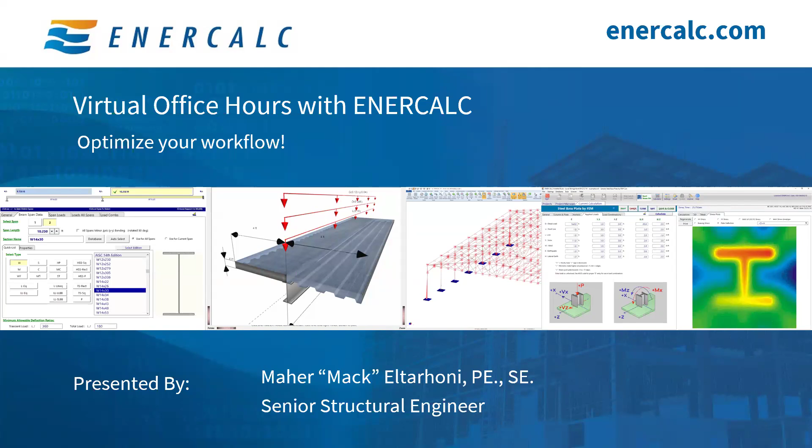First, I'd like to start our session with a brief overview of our overall agenda. We will be going over ENERCALC's latest updates, the what's new with ENERCALC, and we do have a lot of exciting updates today. Then we have the steel base plate design module and the bolt group analysis module. Then we'll go over registering for office hours to get notified for future installments, future sessions, and of course, live Q&A at the very end of our session.

First, I'd like to encourage you all to check your software to make sure that you are on the latest build of ENERCALC. Take a minute, open your software, and look at the very top to see the build that you're on. We do release monthly updates, so we want to make sure that you are using the latest and greatest of what ENERCALC has to offer.

We commonly receive questions on our support line, and a good majority of those questions are things that already have been addressed in recent updates. So always make sure that you're working off of the latest and greatest. That most of the times will fix many of the problems that you might be facing. Otherwise, you can always just email us at support@enercalc.com.

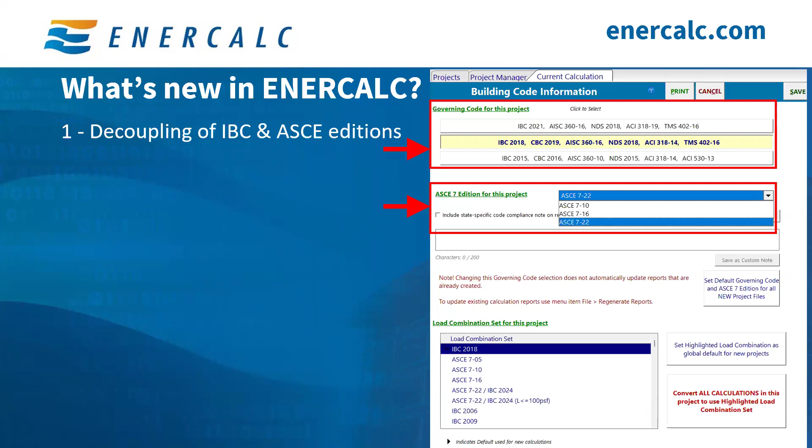Of course, the past few months we have done this, which is the decoupling of the IBC and the ASCE. This is due to some jurisdictions asking to mix and match IBC editions with ASCE editions. So they might want to use IBC 2015, but they want to use the latest and greatest ASCE, so ASCE 7-22. Before that, we were just lumping up everything in one spot, so based on the IBC you use, it'll grab all of the codes or the design standards referenced under it. But now you have the ability to select an IBC code different from the ASCE design standard, and this will hopefully provide you more flexibility in meeting the jurisdictional requirements that you have to adhere to.

The second update, which is also regarding the ASCE 7-22 modules, and I'm sure by now everyone has noticed all of these additional updates under the add a calculation or add calculation menu.

So the first tab is the seismic loads tab, and in here we added calculation modules for seismic base shear, seismic wall anchorage, and seismic demands on non-structural components.

Of course, another exciting update that's been going on now for a couple months is the ability to link reactions, which we call load linking, natively within ENERCALC. Load linking gives the user, of course, a huge amount of flexibility to automatically link reactions from one calculation to another, and the ability to change something in one member and have the effects of that change trickle down all the way to the supporting members downstream.

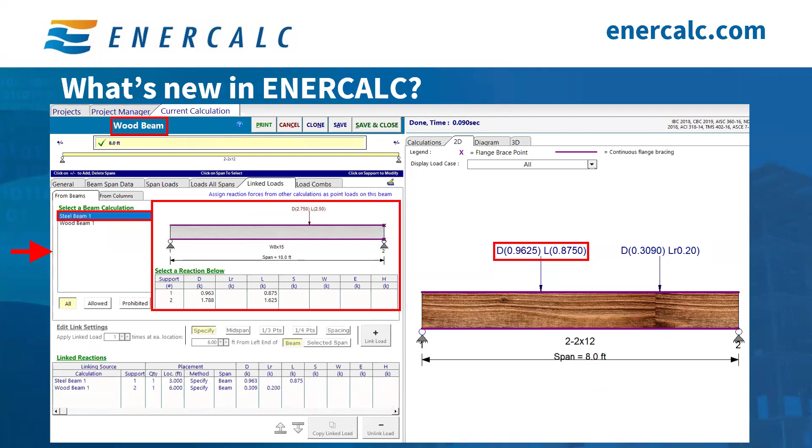And the user here has the same capabilities in terms of placement of linked reactions, just like what we did before in steel beam. So you'll have the ability to put the load at midspan or third points or all of that. So all of the capabilities that you have in steel beams, now you have them in wood beams as well.

And the standard load linking features are, of course, still functional after the wood beam integration, in a similar way that you would typically expect. You have the calc order tab that brings all of the linked calculations together and puts them in the load path order. If beam 1 is sitting on the girder and the girder is sitting on transfer girder 1, then transfer girder 2, depending on how these reactions are linked from one calculation to another, you will get the proper load path order, and you'll have these calculations listed in that load path order to make sure that everything is performed properly.

And of course, at the bottom, you still have your status badges right here that show you that if it's green, then the calculation is up to date. And then you have the orange and the red warnings.

And of course, the last item here at the very top is the recalculate linked loads button. That's whenever you change something in the first beam, and now you have 3 or 4, maybe 5 downstream members that got affected by that one member that you changed. So you don't have to go and re-update each calculation individually.

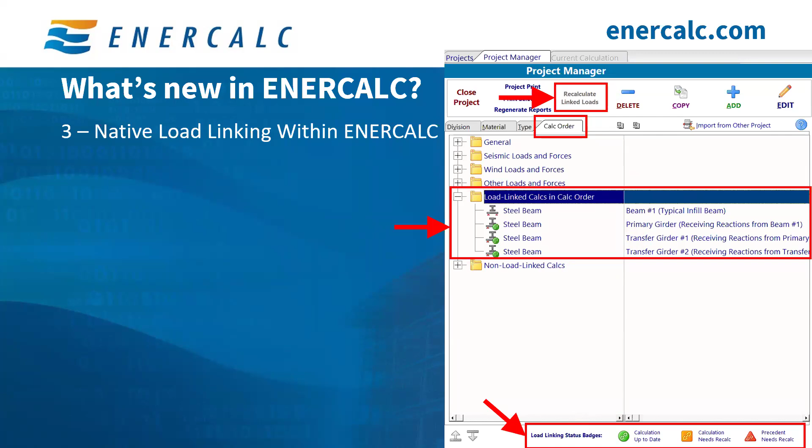All you have to do is just say recalculate linked loads, and ENERCALC is smart enough to know the load path and perform those recalculations in the proper load path order to make sure that all of those effects are trickling down to the members downstream. So overall, load linking is a powerful tool that allows engineers to create a well-connected chain of calculations while minimizing the risk of transcription errors.

And of course, now supporting steel beams and wood beams is definitely a great addition that's been going on now for a couple of months.

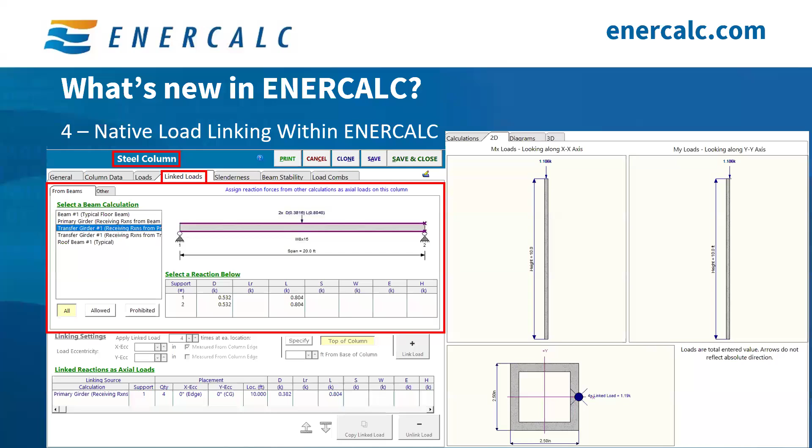And use that. Another update is training videos. We created additional tutorial video playlists, and they're posted on our YouTube channel. These playlists are easy to digest and provide step-by-step information on how to use ENERCALC. One that we recently updated is for the composite steel beam module. This goes through the various options, the loading, how to read the results, how to model everything, and the various options in correlation with the code as well. So this is very useful.

And the other one that we created recently is the soldier pile retaining wall module training video. That will take you through the whole process of how to use this module and understand its capabilities and limitations. And of course, we're going to have more tutorial playlists to come.

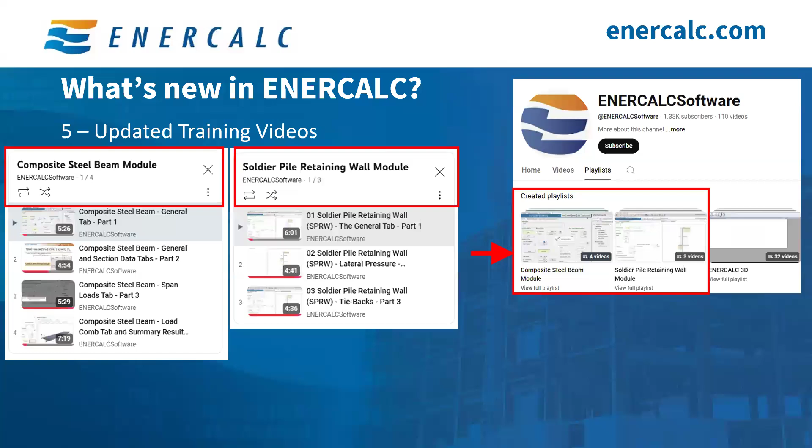So another update, yeah, it's been a busy month here at ENERCALC. Another update is the incorporation of the IBC 2024, and that is now supported as a governing code option. We will continue to support IBC 2015 as well to provide our users with as much flexibility as possible to be in compliance with the jurisdictions that have not caught up to the newer editions of the IBC. I'm personally located in Oklahoma, and I work in a few adjacent states, and my company still gets projects where we have to use IBC 2015. So it definitely hasn't died yet. So ENERCALC is making sure to keep that for our users.

And to update your project to use IBC 2024, it's pretty simple. Once you open a project, at the very top, you can find here the Building Code and Load Combinations tab. If you click on that, it will display this window that we're seeing here in the back. And pretty much all you have to do is pick the IBC that you want, and of course, click Save and Close, and you're good to go.

Now, keep in mind that this will change the code only for the current project that you're working on. So if you need to change ENERCALC to use IBC 2024 as a default for all of your future projects, then the way to do that is to go to the very top left corner, click on Settings, and then click on Default Governing Code and ASCE 7 Editions. This window will pop up.

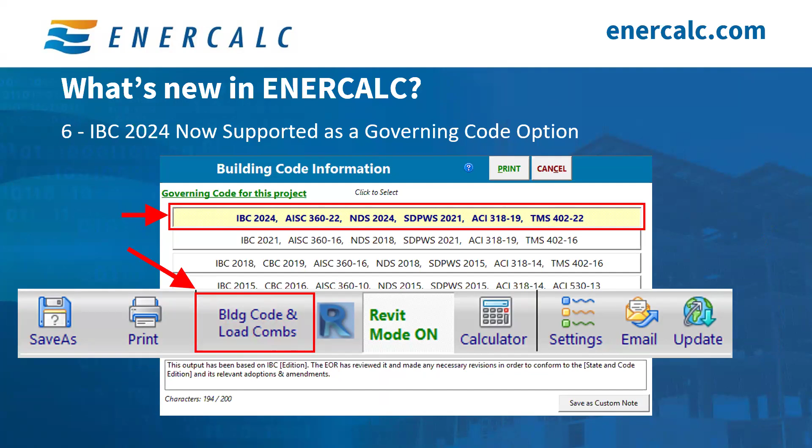The last item I want to highlight before we get into the steel baseplate module is ENERCALC for Revit. ENERCALC for Revit is a Revit plugin that allows you to design structural members fully within Revit. You don't have to export any information. You're not exporting stick models, stick analysis, stick frames, or any of that stuff to another calculation software. You're practically doing everything from within Revit.

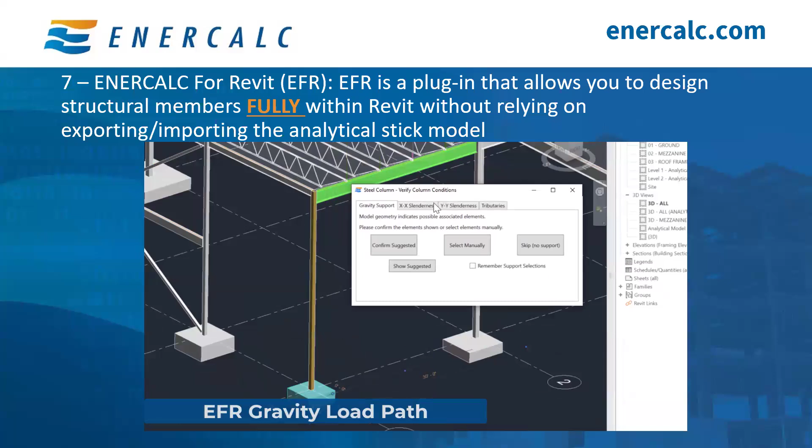It's a simple point and click, as you can see here, and it allows you to design a member in a fraction of the time. All you have to do is follow simple guided prompts that will take you through the design process, and before you know it, you will be done with the design. It's that easy. And currently, EFR, or ENERCALC for Revit, supports the design of steel beams, steel composite beams, wood beams, steel columns, and foundations. So that provides a full gravity load path for you. And more is already in development and underway.

And while we're on the topic of ENERCALC for Revit, it is worth noting that Autodesk released Revit 2026 on April 2nd, 2025. So that's exactly 1 week ago, last Wednesday. And I'm excited to share today that ENERCALC already released the update for the ENERCALC for Revit product, which provides support for Revit 2026. We know that our users rely on our software for their daily engineering tasks, and we want to make sure that ENERCALC is never the bottleneck of your production line.

So we issue these monthly updates to make sure that everything is updated as much as we can, and to make sure our users are best equipped to handle their daily tasks. So this update just released today for ENERCALC for Revit. For our users who have ENERCALC for Revit, if they have a project that uses Revit 2026, they are good to go. Once they have this update installed, they will be able to move on with their production.

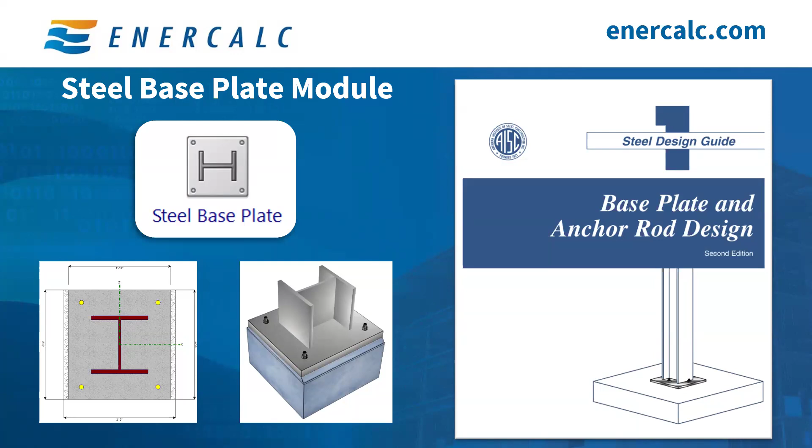So moving on, the focus of our session today is the design of steel base plates in ENERCALC based on the second edition of the AISC Design Guide #1. So here's a quick overview of the capabilities and features of the steel base plate module. You can perform analysis of steel plates as well as anchorage forces, so anchor design, or the forces that go into the anchors. Ability to apply axial loads, shear loads, and moment loads as well. Next you will have dynamic 2D sketches and 3D sketches for visual confirmation, and results include max tension per bolt, and that is very, very critical.

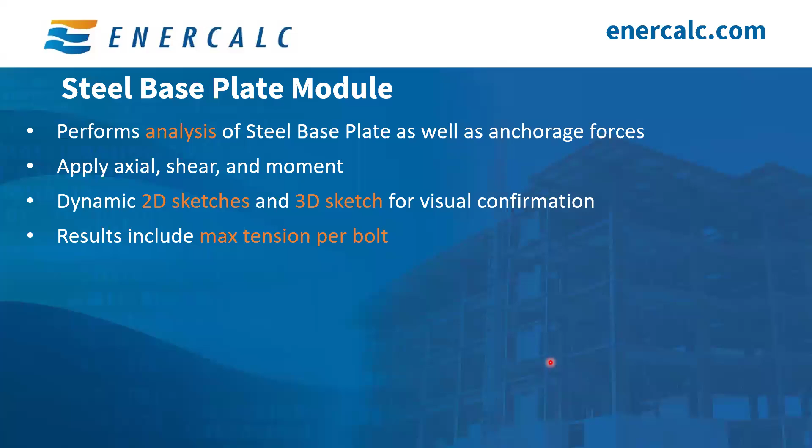So we're gonna go through this example today, and our example is that we need to design or examine a base plate that is 24 inches by 22 inches. So the N dimension is 24, that's the length of the plate, and the width of the plate is 22 inches, and we want to have an edge distance of 2 3/4 inches. We have concrete support below the base plate. This is just a pedestal that is 24 inches by 22 inches.

So a pedestal that's exactly the same width as the base plate. We have a W12x96 column. F'c for concrete is 4 ksi, or 4,000 psi. The ASD factor of safety for steel is 1.67, and the ASD factor of safety for concrete is 2.31, and those come directly from the AISC manual. The applied load is 50 kips axial, and we have a moment of 120 kip-feet.

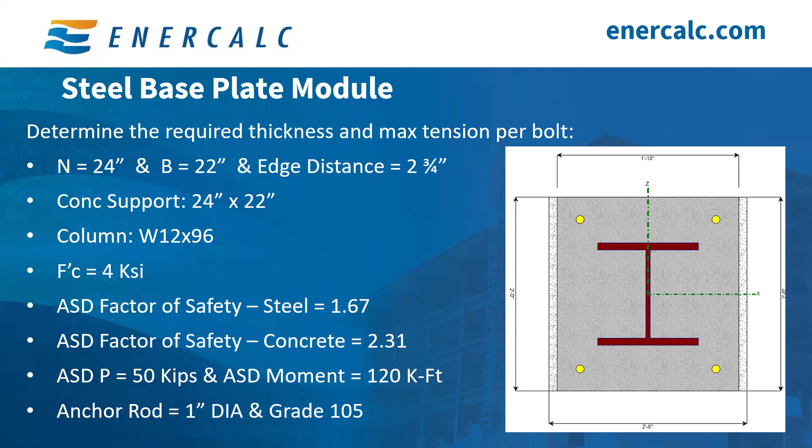And we are using 1-inch diameter rods, grade 105. So this is what we're using today to make our evaluation of this base plate. To start a new base plate calculation, we follow the same familiar process. You click on the Add button, navigate to the Miscellaneous tab, and click on Steel Base Plate to open the new calculation.

So again, the same standard process that we use for all of our modules. We work our way through the tabs from left to right, starting at the General and Materials tab right here, all the way at the top left. First, we give our calculation a unique name. I'm naming it: example base plate AISC Design Guide 1, axial plus large moment.

If you're familiar with the design guide, there are different methods and calculations. You have axial alone, moment or bending alone, axial and large moment, axial and small moment, and axial and biaxial bending. Just to make sure we're all on the same page, this module does not handle biaxial bending. And the second thing it does not handle is net tension.

So if you have net tension or net uplift, pure tension on your base plate, this will not be able to handle it. However, it handles the other conditions: axial alone, small moment, large moment. It goes through the various calculations. For our example, I went for axial with large moment because that's a little more fun. So that's the disclaimer, the limitations of use and the capabilities, so you know what you're dealing with.

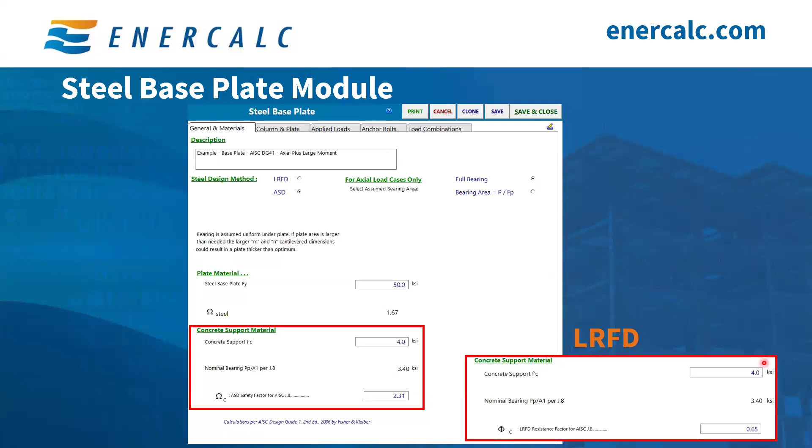So we move on to the next step, the Column and Plate tab, where we give a little more geometry. We have three items to input here: information about the column section we're using, the base plate, and the concrete support, which in our case is the pedestal. Sometimes it's a foundation, or a column on top of a beam, whatever concrete support you're using. That's the third part you have to input.

So with that being said, starting with the first part, in our example we have a W12x96. That's what we need to use.

So we simply click on this button right here. This lookup button will give us this new window, which is the database. You can select the type that you want to use. So for example, if it's a W section, if it's a channel, if it's an HSS, you choose whatever you need to choose from here.

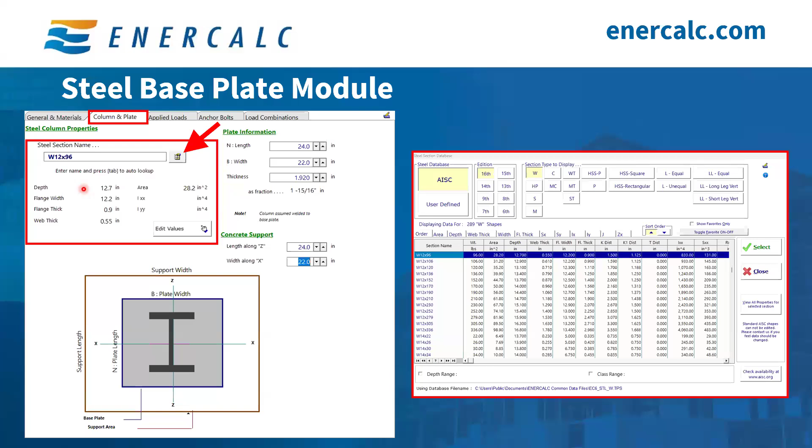And then based on that, in our case, we're choosing a W section, and then you can scroll down until you reach a W12x96. Once you do that, it automatically populates your geometry, so you don't have to worry about that. So that's the first part, pretty easy.

Moving on to the second part, which is the plate dimension. If you're working something from scratch, you have to come up with trial dimensions. The AISC design guide has some recommendations on how to determine initial trial dimensions. But with ENERCALC, you can just plug and play until you come up with something that works for your project, as well as, of course, works from an engineering perspective.

So if you have a column size and you say, hey, I use a 12 by 12 base plate, or an 18 by 18, or whatever you typically use, you can start with that and move forward until you converge on a solution that makes you happy and satisfies the engineering requirements. The guide uses N for plate length and B for plate width, and ENERCALC is consistent with the AISC nomenclature.

Additionally, ENERCALC provides you this sketch right here, and I blew it up a little bit so you can see it enlarged. This sketch makes it easier for our users to visually correlate the labels with the input dimensions. Based on the example, the N dimension of the plate is 24 inches, which is the length. And the B dimension, which is the width of the plate, is 22 inches, right here. And then you can enter a trial thickness.

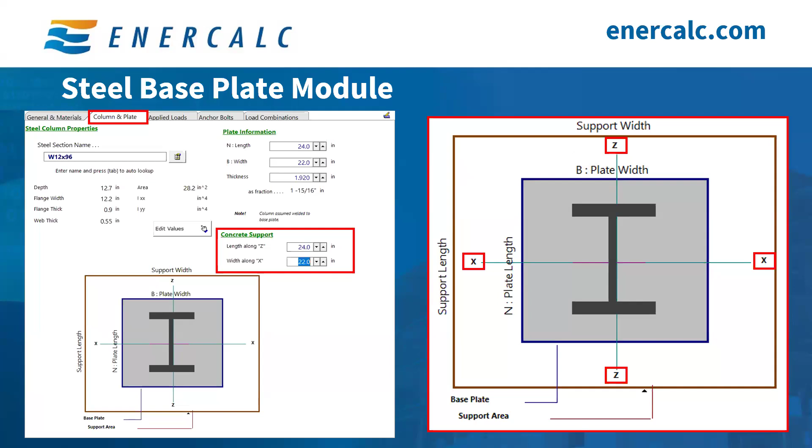So the length along the Z direction, and this is important here, is going to be the same as N. So length along the Z, which is this one right here, is the same as N, which is 24. And then the width along the X, this is the X right here, is going to match the B dimension, which is 22. And now we have a pedestal that matches the base plate dimensions.

ENERCALC is all about empowering users with dynamic and powerful visuals that update in real time to allow the user the ability to check their input data in multiple ways. Some people like to see what they're modeling. Some people are just good with spreadsheets and can build everything in their head with just cells and numbers. So we try to work things out for all of our users.

So if you click on the 2D tab on the right hand side, you will have an accurate 2D sketch with base plate dimensions that match your specific input data, as well as the proper orientation of the column and a visual location of the anchor bolt placement. You can see that it already tells you the column size is W12x96, and you can see the plate dimension. This is the 24 inches, and this is 1 foot 10, which is the 22 inches.

It is important to note that the sketch also shows the concrete support. However, in this condition, because the concrete support has the same dimensions as the plate, you're not seeing it here in the plan view. So just for demonstration purposes, I want to change the support dimensions to 4 feet by 4 feet, so 48 inches by 48 inches.

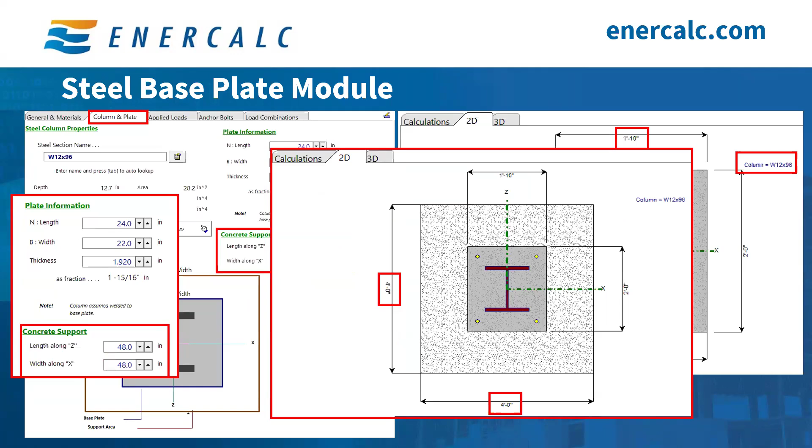And what happens is that the 2D sketch is going to look like this. You'll get the dimensions for the plate by itself, and now this is the dimension for your concrete support, 4 by 4. We don't have this condition, but I just wanted to note it, so you know that the visual depiction shows both the plate and the concrete support.

Moving on to the next tab, which is the applied loads tab, you can apply axial load, shear loads, and of course moments. The sign convention is clearly explained, shown both visually and verbally to make sure there's no confusion.

So we have 50 kips axial load. If you apply positive 50, that means ENERCALC will take that as the load acting downward. That's why it's shown right here. It says P, which is the axial load, gravity load, plus sign is downward. If you put a negative sign, that means it is uplift or pure tension.

Positive value for shear, if you put a positive value... we're not putting anything for shear in this example, but of course, what's a base plate without shear, right? So we don't have that for this example, but you can apply it, no problem. A positive shear means it points towards the positive Z-axis. Negative shear will point towards the negative Z-axis.

And the next thing we have is a positive moment of 120 kip-feet. Positive moment means that it applies pressure, or creates higher soil pressure, at the positive Z edge. So it's in that direction. If it's negative, then it flips, and it applies higher soil pressure at the negative Z-axis edge, which is all the way in the back. So again, for us, we're just going to use positive 120, which is positive moment.

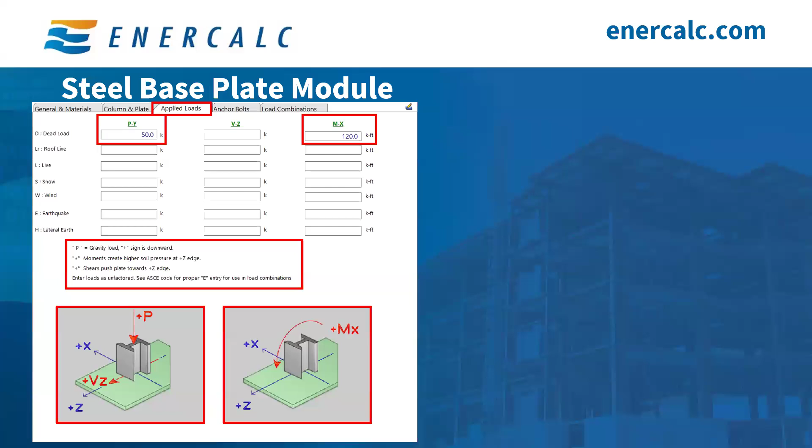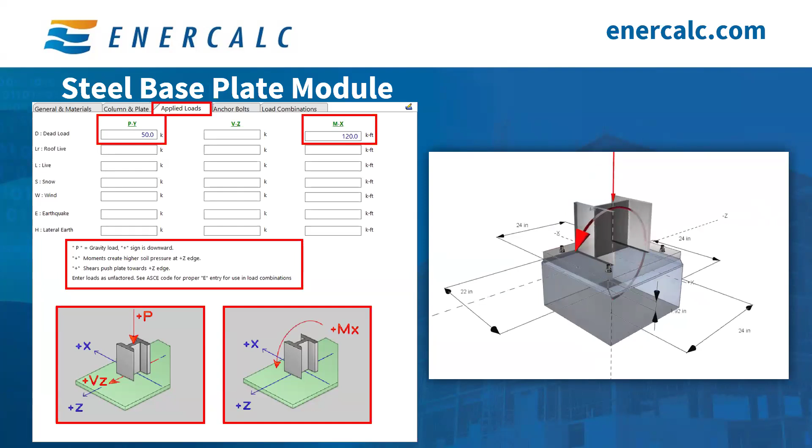On the right-hand side there is also a tab, the 3D tab, where the user will find a 3D rendering of their design that has all of the dimensions and information. This shows the columns, the applied loads, the overall dimensions of the plate and of the concrete, and the X and Z axis directions. You can see here the Z, that's the negative, and this is the positive. I know it's moving, but you can see where the positive is and where the negative is, as yet another way of verifying the input parameters you have entered.

So we keep progressing left to right. The next step is the anchor bolts. This is another important thing to note: ENERCALC does not design the anchorage or the anchor bolts themselves. It will not size your anchor bolt for you, and it will not design your anchors into concrete. That means it wouldn't look into your pull-out capacity from a concrete perspective, or edge distance in concrete, breakout, side blowout, all of that stuff.

That's a whole separate thing, so ENERCALC doesn't do this. There are plenty of other useful tools out there. Hilti does a lot of that already, so that's what most people use. So ENERCALC doesn't do this.

However, ENERCALC gives you the option to input what your tension capacity is for the anchor bolt. It says here: minimum of either the tension capacity of the anchor bolt or the pull-out capacity from your anchorage, whichever controls. That's your maximum tension that your bolt can take, and you should put that number right here. Same thing for your shear capacity that your bolt can take, based on the bolt itself and the various limit states of concrete anchorage, or all of the failure modes.

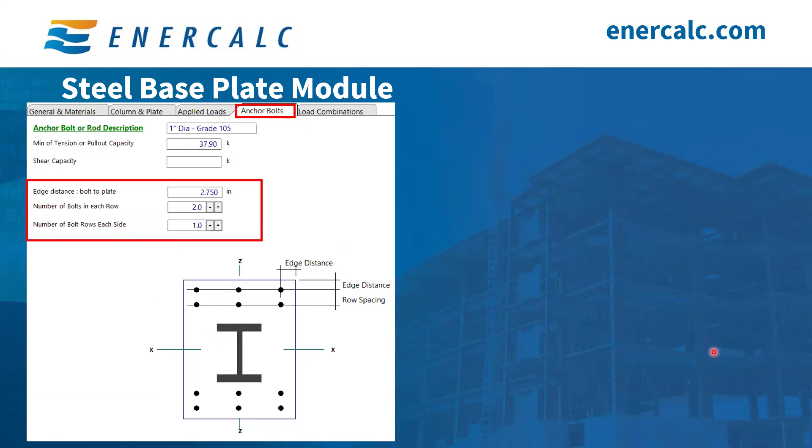Now that we're done with the anchor bolt placement and location, we are ready to wrap up this calculation. We have load combinations—this is the same standard load combinations you're familiar with. You can use a standard IBC, ASCE combinations, or you can create your own. You have huge flexibility here in terms of customizing your own combinations: delete, add, modify.

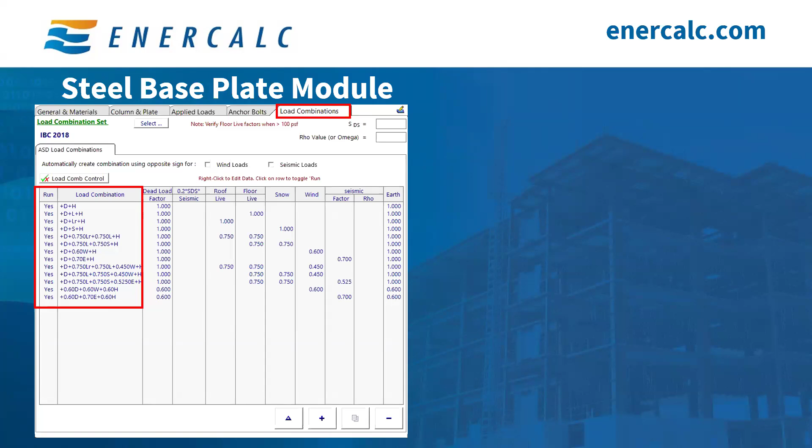You can turn them on and off temporarily. You can reverse direction of wind load combinations and seismic combinations, so you can examine both sides and both directions. So you can do plenty of great work here with load combinations, just like what you can do with many of the other ENERCALC modules.

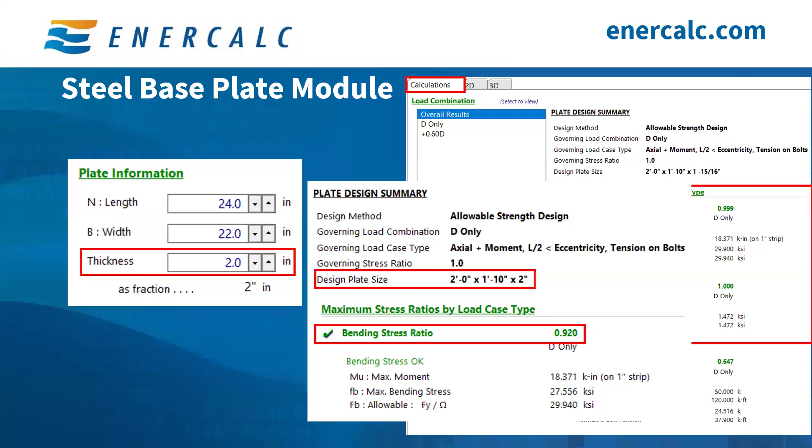Next, you'll get a little more information about the plate bending stress ratio, as well as the plate bearing stress ratio. Right now, the stress ratio is at 99.9%, because I picked the plate thickness to be the absolute minimum required, which is why I'm using a weird number, 1.92 inches. But I'm not going to spec a 1.92 thick plate, so you'll move forward and spec a 2-inch plate in your detail. If you update it to a 2-inch plate, you get a 92% stress ratio, which is obviously better than the 99.9 we had earlier, so we are good there.

Lastly, ENERCALC reports the bolt tension stress ratio at 64.7%. You can see the tension here - this is what matters a lot to me and everybody: the tension in each bolt is 24.5 kips. Personally, what I would do is say, okay, my bolt works, the maximum tension is 24.5, and I can go examine the anchors in concrete based on this load. With 24.5 kips of ASD load, I'd check how much embedment and edge distance I need so I can transfer the load to the concrete support below, whether it's my pedestal or foundation. If I need to add confinement or additional rebar to make this work, we'll do that, but that's outside the scope of this module.

So with that being said, pretty much you designed your base plate based on the requirements given to you. You know all your loads, and your base plate is good to go.

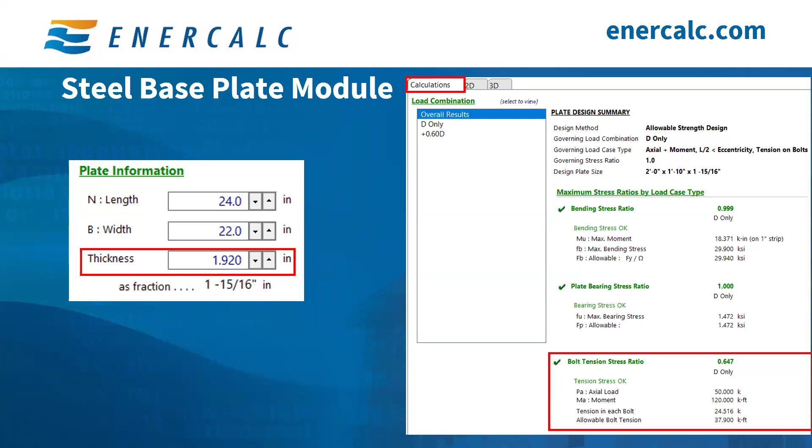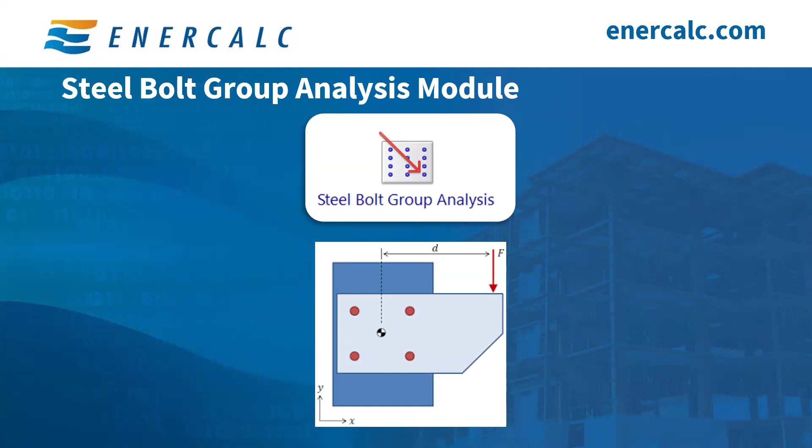Moving on to wrap up our session, I want to talk a little about the steel bolt group analysis module. I use this module all the time, with a lot smaller loads than my example here shows, but I use it very frequently for the work that I do.

It's a very simple process to start this. Click on Add, click on Miscellaneous, and then click on the steel bolt group analysis module. Once it opens, it's very straightforward. You start at the general tab, give it a name, and pick your load combinations. We're using analysis load combinations here, not design purposes, so for analysis I'm just using ASD load combinations.

The example we have is very generic right now, just a simple outrigger. We have 4 bolts, with spacing of 4 inches in each direction. The D distance from the center of the group to the applied load is 10 inches, and I am applying 500 kips worth of ASD dead load.

The way this works is very simple. All you need to do is tell it how many bolts you have, and it'll give you these coordinates that you can build up. So you start with this one: 0,0. Then 0,4 - that's the second one. Then 4,4, and then 4,0. So you just build them up - it's a very simple coordinate process.

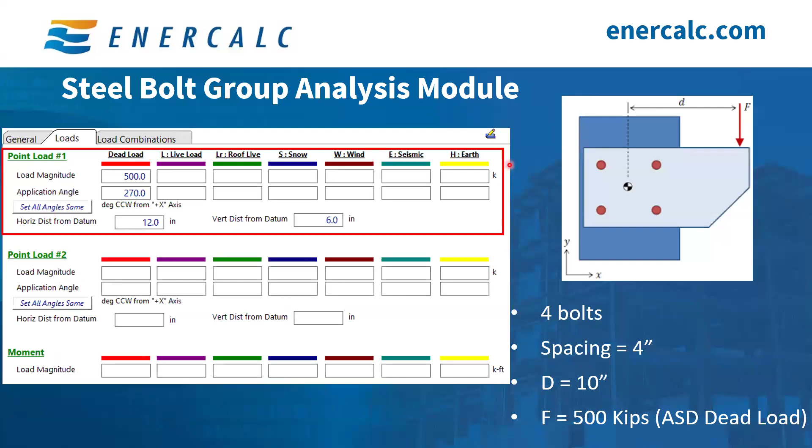So keep in mind that all of the input here is in kips. All of the input here, the results, and the input is all in kips right here. So just make sure that if you have 500 pounds, it's a 0.5. It's not really 500 kips. Just make sure that you're consistent with your units.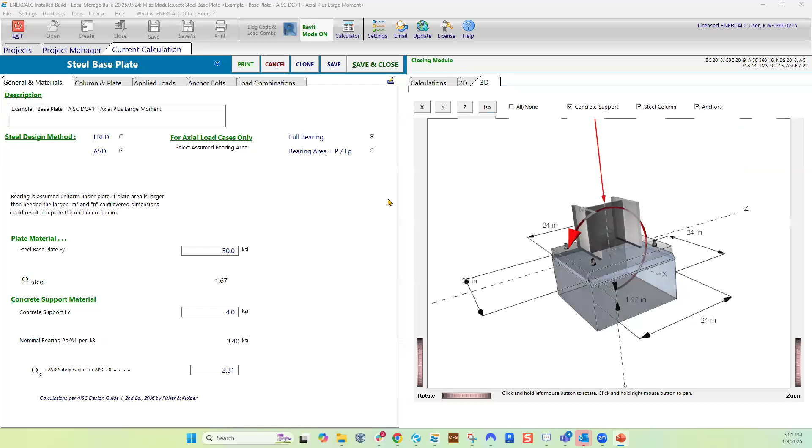Yeah, let me open a calculation here. But just to show you a quick idea before I get into this, once you find the calculation that you want, like a steel beam, you can right click on the calculation and say save to CSV or copy to clipboard. You can do some work there. But let me pull it up while I create a new calculation because I don't have one ready. We can go to the next question while I do this.

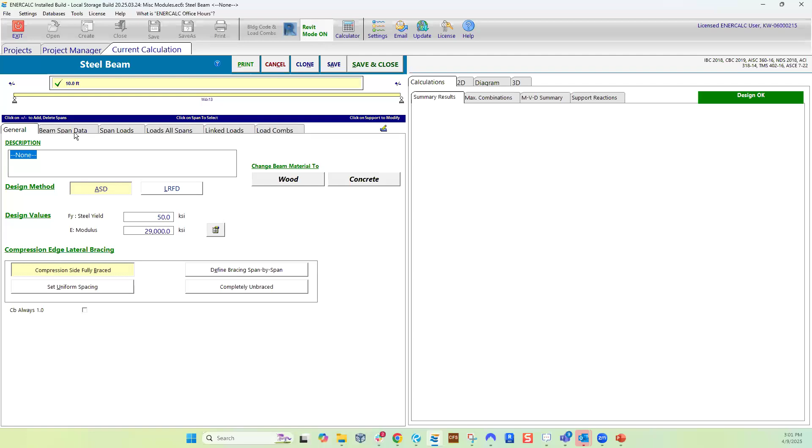Yeah, for sure. So another common question, there's a lot of new updates. Is there a place where you can see all the updates listed? Which is a great question. Updates.enercalc.com will take you to our release notes page, and you can always see the full rundown of what's happening in our latest version releases at that location. So updates.enercalc.com. I'll go ahead and drop that in the chat so everybody has it.

Do you see my screen? There you go. Yeah, perfect. So if you have a calculation that's already built up, you can get into your information here, click on whatever you want, and say save to CSV, and that will save all this as a CSV file that would help you do some of that comparison.

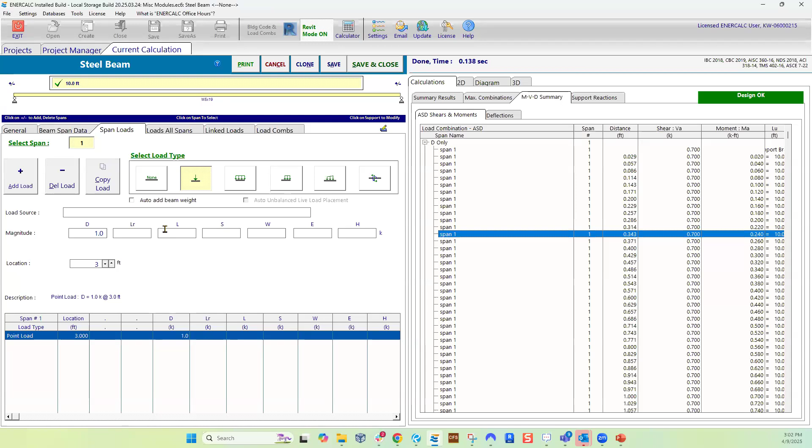Perfect. All right. Question about the steel bolt group analysis. Would you be able to change the direction of the load? Yes. Let me exit out of this real quick. Yes, you can. That's exactly the whole point of the angle application. So let me show you here.

So if you open this, let me open the sketch. So right now this is pointing downward. What I can do, I can just say this is 180, and that will change the load to point towards the left. I can do 0, and that will make the load point to the right. And of course, I can do 90, and that'll make it point upward. And I can actually bring this load wherever I want.

So right now, the load, let me change this back to 270. So the load right now follows my example. It's acting downward, applied right here on the outrigger. And maybe you have it on the opposite side. So you can just do -12, and it'll actually come on the opposite side. Maybe it's a little bit lower. So maybe that's at, you know, 4 inches.

And maybe you don't have a nice clean angle. Maybe it's a weird 230. That's where your load is applied like that. So it'll do all of the analysis and come up with all of that X and Y component. You see that the direct shear right now shows you what your X is and what your Y is. Compared to my example earlier, the direct shear was only in the Y direction because it was just perpendicular. As you can see, it's right here.

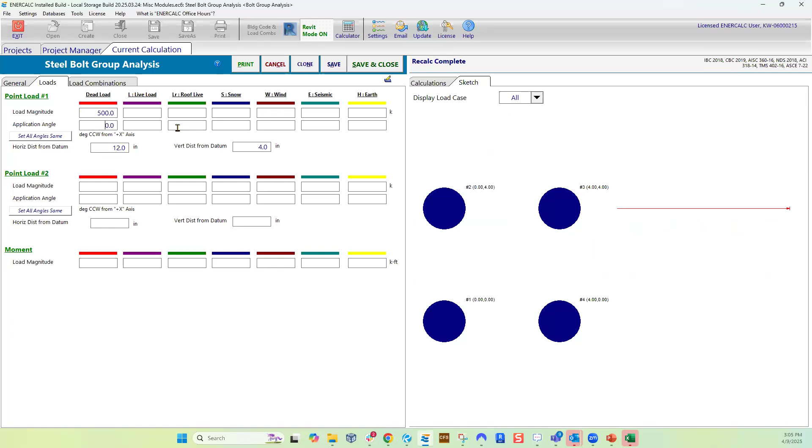If the arrow is pointing to the right, then it's 0. If it's pointing to the left, it's 180. I would rather use that because I'm a visual person, so I have to see it in order to visualize it and be able to compare and assess the results. But yes, if you look at it here, for example, the shear due to torsion in the X direction right now is 26.5 and it's positive. And if I change that, it will change to negative 26.5. So it's definitely doing it right, but it's not adjusting the visual display. So I wouldn't use that. I would just stick to using the application angle.

Perfect. All right, next question. When are welded connections coming? So, for those who may not be aware, the capability that Mac is showing here, steel bolt group analysis, is actually not a new capability. That module has been in ENERCALC for a long time. We don't have any additional steel connection design capabilities in active development right now, but if you have a feature request, you can absolutely send those to support@enercalc.com. But just to be clear, that's not a brand new feature.

Yeah, from my personal experience, I have been using this particular module since probably 2016. So it has been there for a while.

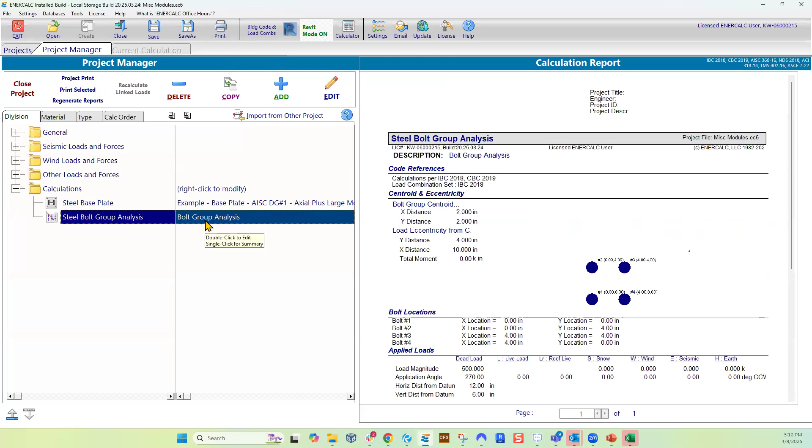All right, next question. If there's a moment from wind load applied to the column and beam connection, where exactly should we be able to apply that load? Oh, okay, there's a second follow up. If there's a shear from wind load applied to column and beam connection, where exactly should we apply the load? So that sounds like it's in reference to your eccentric bolt group analysis rather than the base plate analysis. But go ahead with what you're showing there.

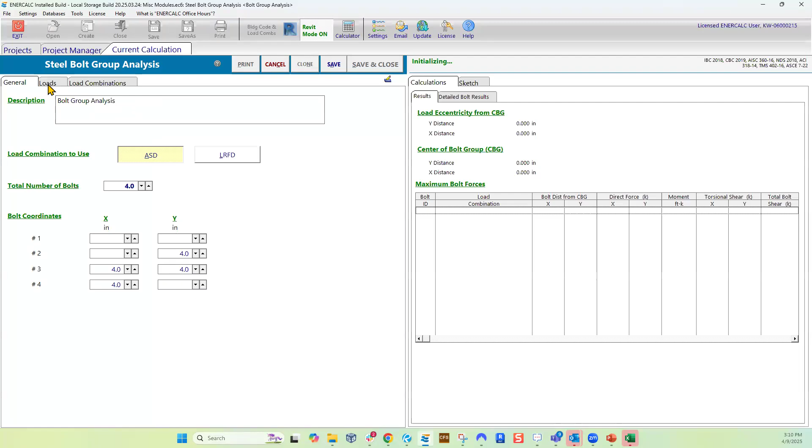Oh, is that for base plate, or is that for if the moment from wind load is applied to column and beam connection? Do you think this is for the base plate, or do you think for the other one? It sounds like that's in reference to your eccentric bolt group. Okay. Let me go back and read this again. Yeah, so there is a moment field, in addition to the eccentric forces, there is a field in the bolt group analysis to explicitly apply a moment. Yeah, so that's what I want to show here. So let's go back here and make sure that we answer this.

So you have the ability to enter 2-point loads and a concentrated moment. So if you have, let's say, a point load that is from wind, then you can put that right here. But what I want you to know is that if you apply this load with the eccentricity, then it automatically calculates the moment. You don't have to go and superimpose another moment again. Now, if you do have a true concentrated moment that's not associated with any vertical or horizontal load, just a pure moment, you can apply a pure moment separately right here. Does that make sense, Seth?

Mm-hmm. So if you have some sort of a wind load that's being applied, and you already apply it at an eccentricity from the centroid of the bolt group, ENERCALC will already calculate the moment effects of that and make sure it grabs the shear as well. So that's why you see here it says direct shear. That's pretty much taking 500 divided by the number of bolts. That's direct shear. And then it shows you the moment right here, and then it shows you here the torsional shear. So this is the total moment that you're getting because of that load. And then that load is getting analyzed to get the shear due to torsion from that.

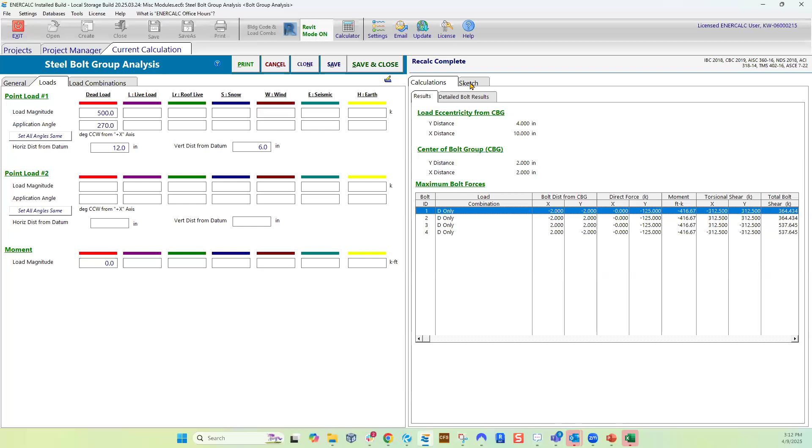Yes, all right. He said, "Can you do lateral?" Because that's the follow-up question. Sorry. Can you do lateral and vertical load at the same time? The answer is yes. I'm gonna go ahead and put two kips, and I'm gonna do a load application of 90 degrees, and let's... Oh, that's 90 inches. Sorry.

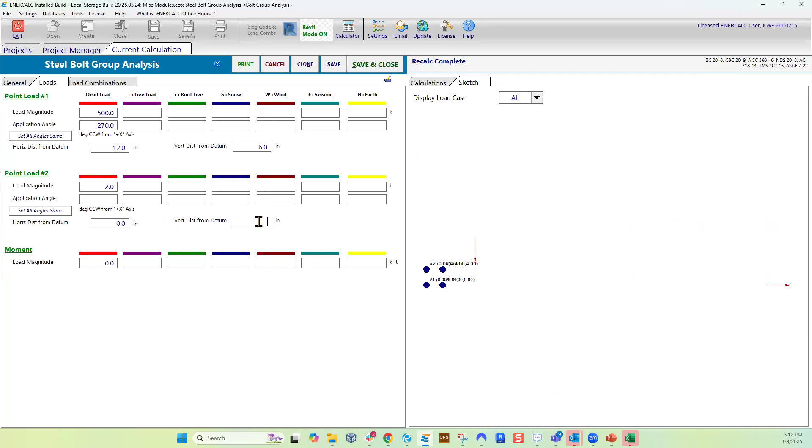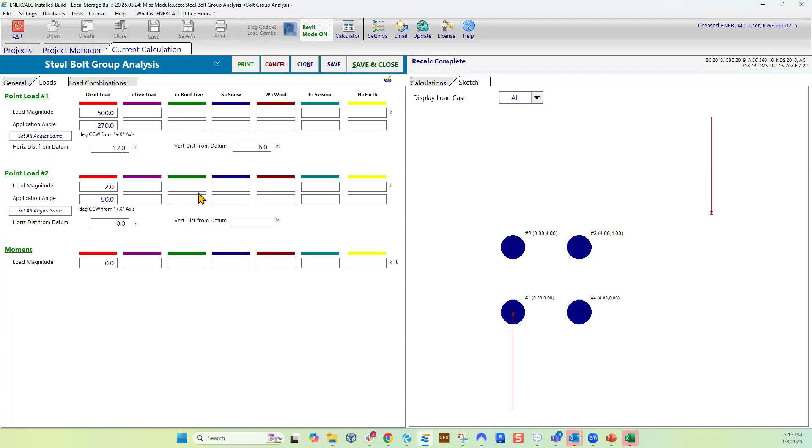I'm gonna have to look into this because I'm not seeing it. One second. Where's all this? Yeah, there it would go, just be your second row. There you go. Yeah, it just kind of took me a second there. Let me do this at 180. There you go. Sorry, took me a minute.

And let's say you want to put this at, if you want to put something like this, do it like that. If you have a horizontal load that's coming like this and you have a vertical load coming like this, all of that is going to get accounted for.

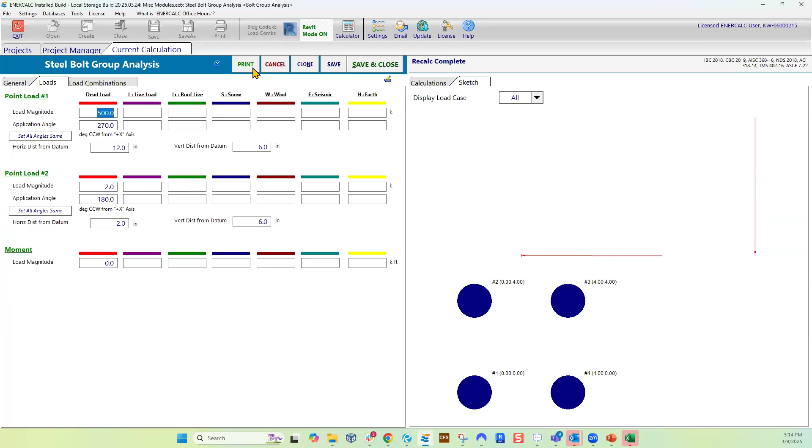If you do have your controlling axial force coming from wind or seismic, then yes, you have to be aware that that could result in net uplift. But that doesn't necessarily mean that you should dismiss out of hand the checkboxes to reverse those options. That's kind of up to the individual engineer when you're tackling a particular design.

Right, for sure. And then you still have the option to consider reversal of your lateral VZ shears, even in the case where your controlling axial force comes from something other than those wind and seismic. So using the reversal checkbox does not necessarily mean it's going to break your results or halt calculation like Max showed there.